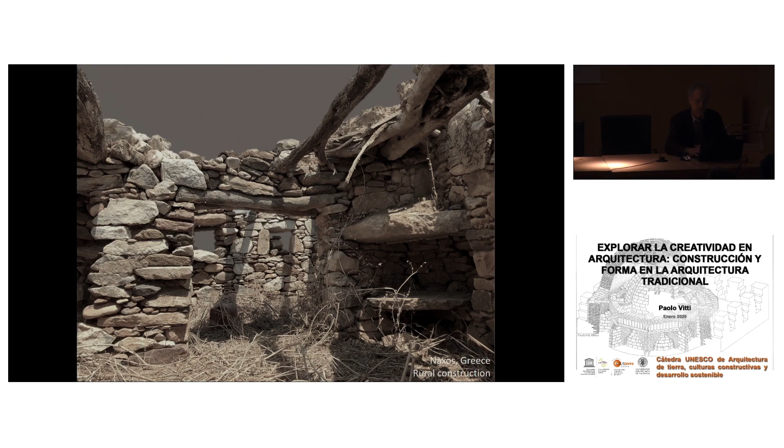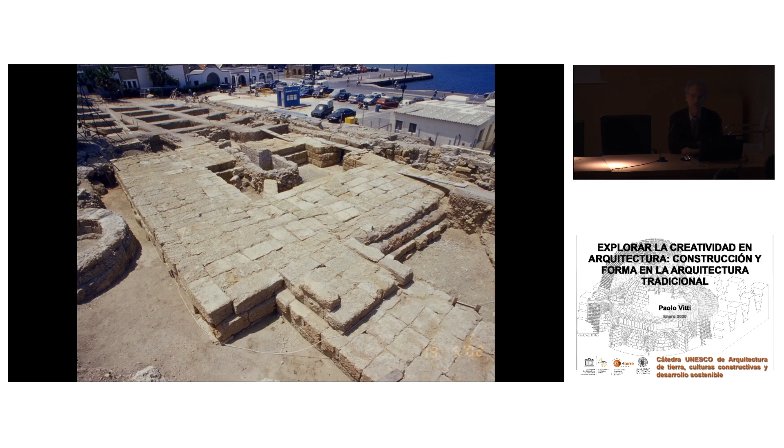I will start my talk with this sentence. There is a very famous architect, historian, conservator, the founder of the Faculty of Architecture in Rome, who is Gustavo Giovannoni. And there is this sentence that I find very interesting, especially today. The architect has to be, first of all, a builder. Forms must come out from a deep understanding of structures.

Doing the opposite, by beginning a conceptual design, a blank elevation, is irrational. And the young professional will never redeem from this. This is something to always keep in mind. Today we have many projects that start from the form and then get to the structure, while the right approach is to have a holistic, global view of the project.

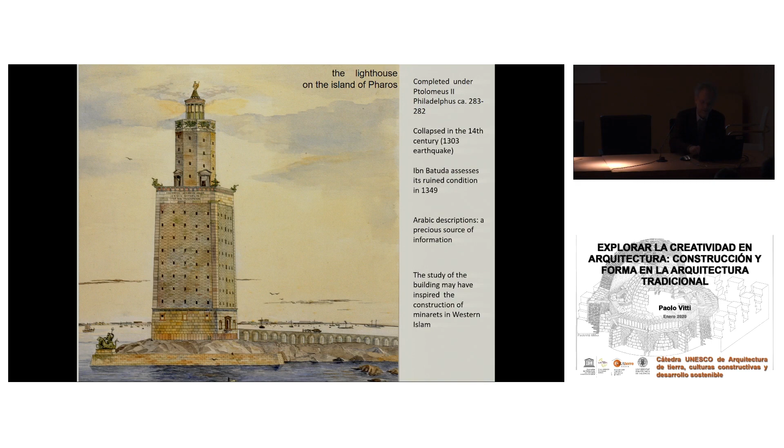I will start showing this, which is a very simple construction. Here the challenge is dry masonry without mortar. Materials are kept together by a good approach to resist the forces. And this is a vernacular construction you can find everywhere in the Mediterranean, but also beyond the Mediterranean.

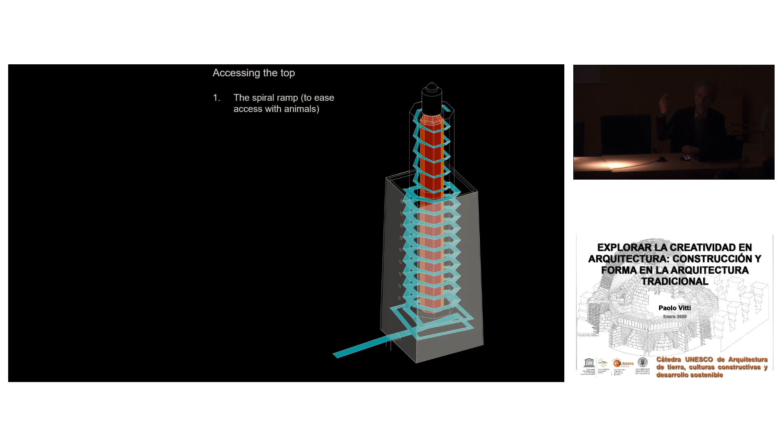In the Hellenistic period, that is to say from the 4th to the 1st century BC, there is a change in the dimension of construction. And the challenge is to make buildings that are monumental using the principles of dry masonry. Dry masonry, as we said, without bonding material, mortar. A typical example is in the island of Rhodes in Greece, where you can see a tower which is made with blocks, ashlars of stone, which are placed dry.

Now, one of the wonders of the world was the Lighthouse of Alexandria. I suppose you all know about this building. This building was completed in 283 BC, and imagine, it collapsed only in the 14th century AD. That is to say, it's a building that lasted for more than 1500 years, which is amazing for a construction which was monumental and was made out of dry masonry.

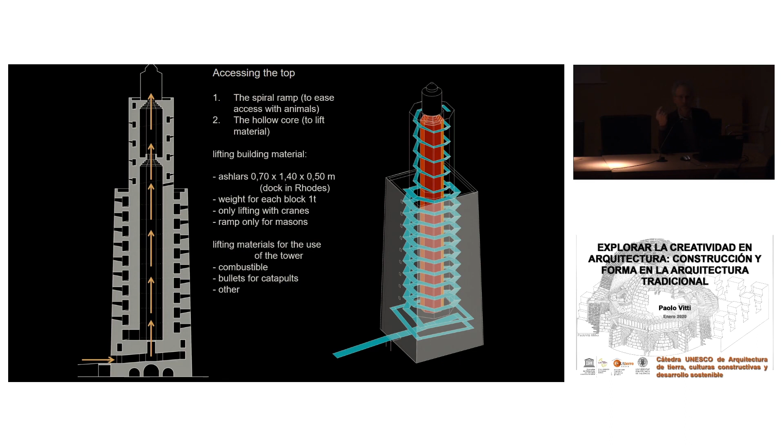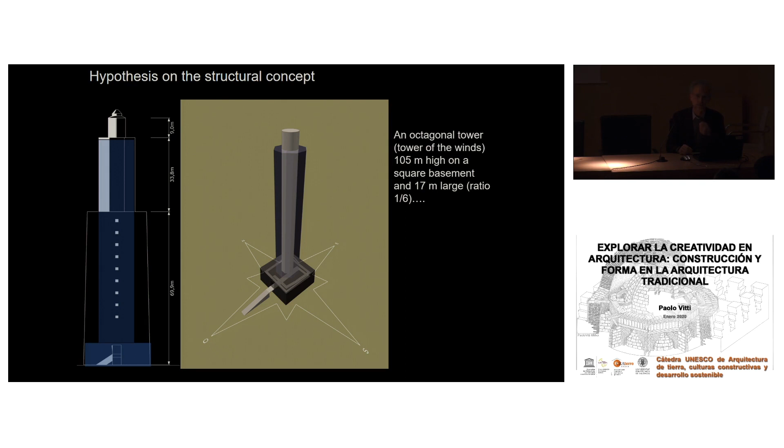So here we understand that the architect is facing the challenge of a structural system to transform it into form and architecture. So let's look closer at this project because it may be useful for understanding later architecture. First of all, since it has collapsed, we have no evidence of it. But we know very well about the architecture through the Arabic descriptions. The architects coming from Al-Andalus were traveling to Mecca, passing through Alexandria, and in Alexandria they were impressed by this architecture.

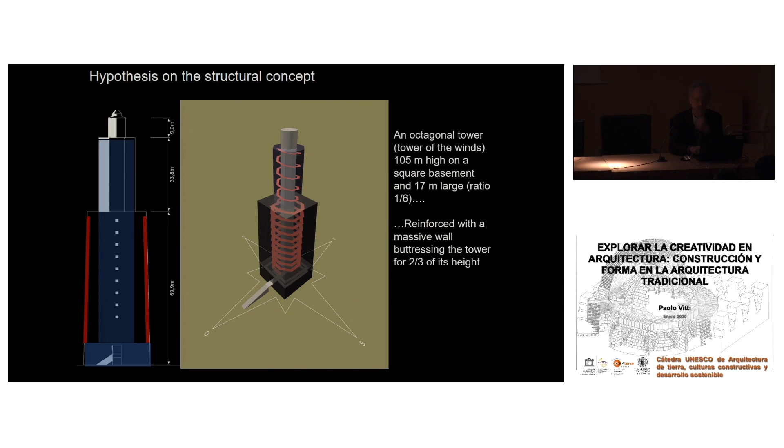From these descriptions, we know that this tower, which was more than 100 meters high, had a spiral staircase, a spiral ramp going up to the top, as you can see in this drawing. But most interesting is that the center of this gigantic tower had a core that was hollow, that is to say empty.

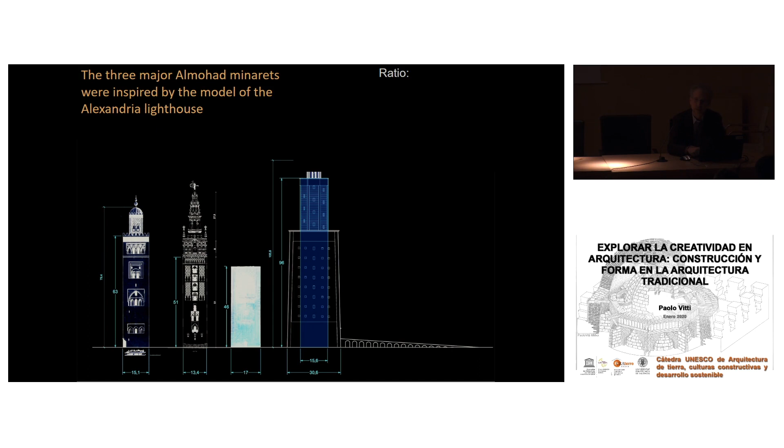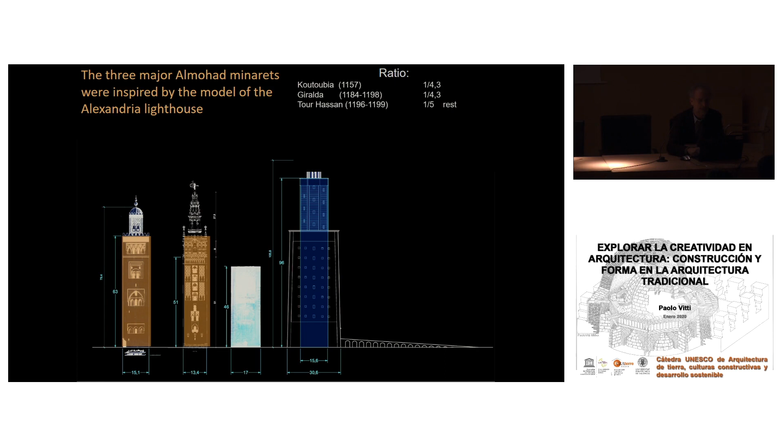This is exceptional considering the concept of Hellenistic architecture, which is based on the idea that if you want to make it big, you fill it with material. So the big towers would be something that has plenty of material and not a hollow space at the center. The reason for that is that this could make it easier to lift materials during the construction.

This was built on the island of Pharos. And Pharos is the name we use for lighthouse in many languages, as in Italian, in Greek, and many other languages, not in English, which is lighthouse. And the tower took the name from the island that it was on in Alexandria. And so the empty core of the tower was useful to lift up materials.

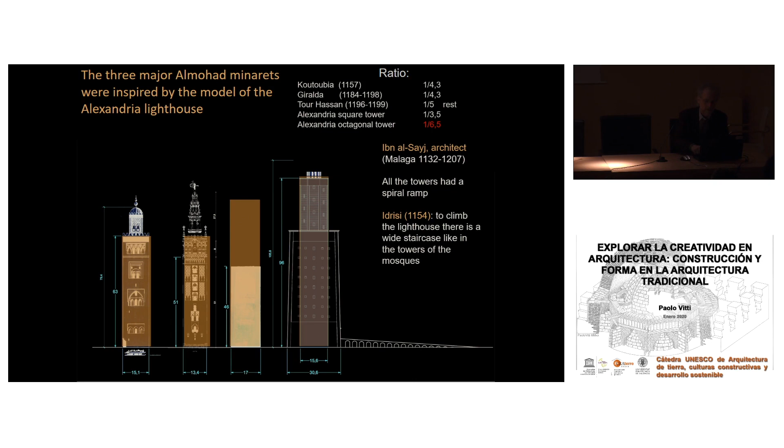But it was also useful because this was also a defense tower, so you had the use. So it was a very clever concept, but it was a challenge. The challenge comes from the fact that such a high structure in the 3rd century BC typically would have been built with a core which was filled with material in order to be high enough. So here the concept is extraordinary, is innovative, is a way to face not only the construction issues, but also the functional issues.

Imagine that this construction is built, there is a ramp. This ramp is used by the masons to go up, and the material is lifted from the core and placed all around. So the tower grows and goes up. Imagine doing the same thing with an exterior scaffolding. It would be very costly, you need a lot of wood, but most of all you are on an island. And so this poses many problems.

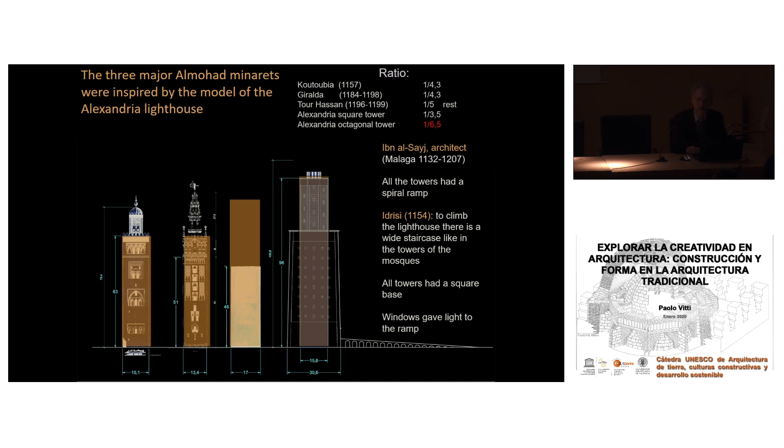But where does the form come from? Because the form of this tower is composed of two elements. You have a lower sector, which is made with a square construction, and then you have the upper part with an octagonal one. We know that from the sources. It's very clear.

The fact is that the octagonal tower had to be very high, as much as 100 meters. But in order to resist and to become stronger, the builders imagined buttressing this tower in the lower part. You see the red vertical lines. The red vertical lines are the ones which show this buttressing structure. So the form was generated from a concept, a structural concept.

Another very interesting element is that, as we know, under the Almohad dynasty, they started to build gigantic minarets. The first one of these is the Koutoubia in Marrakesh. These minarets have many elements in common with the Lighthouse of Alexandria. The Koutoubia was built in 1157. Then comes the Giralda, you know very well, in Sevilla. It's slightly later. And then the last of them is the Tour Hassan in Rabat.

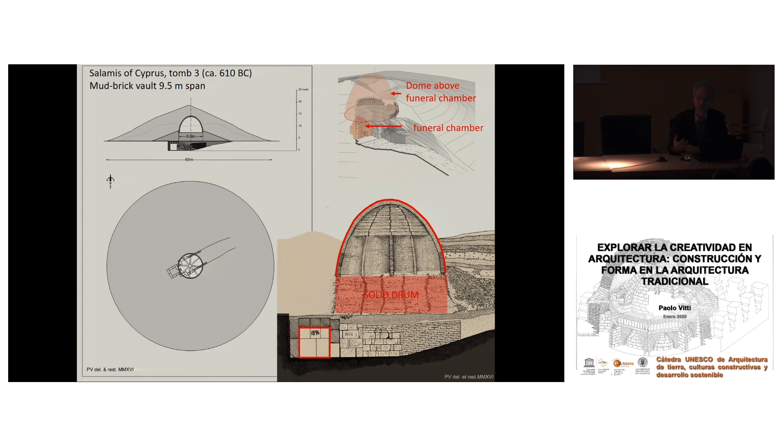Here I show the ratio between the base of the tower and the height. And then you have the Lighthouse of Alexandria, which, if you consider only the octagonal tower, you have 1 to 6.5, and it becomes more slender if you remove the buttressing part. This is to say that there are similarities.

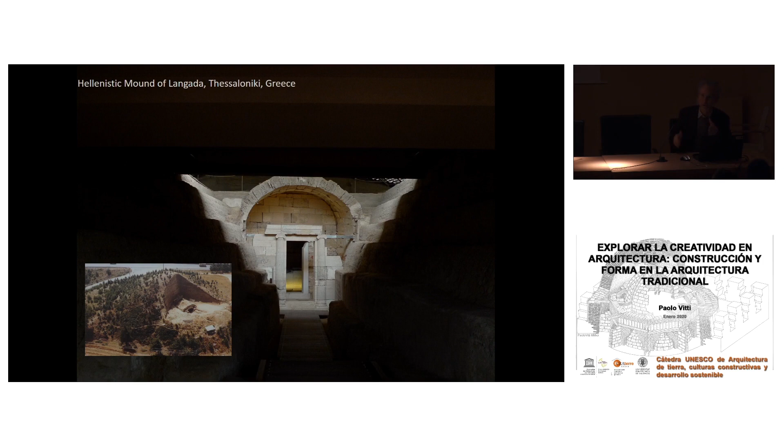But the most important element is that the most precise description we have of the Lighthouse of Alexandria comes from this architect who was from Malaga, who gave the most precise description of this lighthouse. And we are, as you see, exactly in the period when these gigantic minarets were built. So I strongly believe that these minarets were inspired by the structural concept of the Lighthouse of Alexandria.

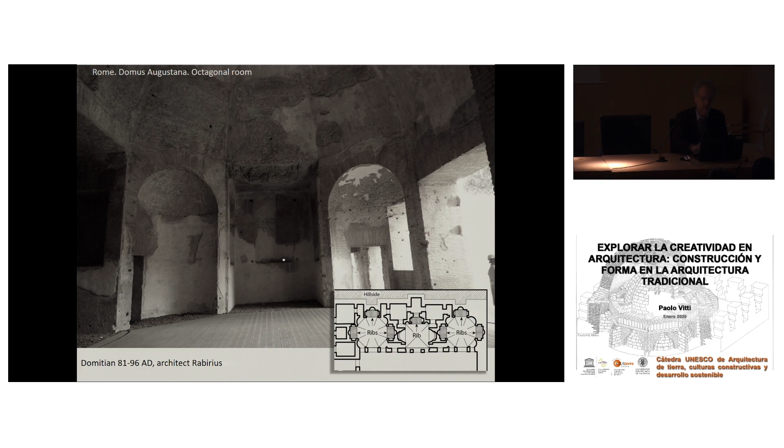This hypothesis is supported by the fact that the three minarets all have a spiral ramp which goes up to the top. Actually, this is supported also by the description of Idrisi: to climb the lighthouse, there is a wide staircase like the towers of the mosques. Moreover, in the three minarets, at the center, we have rooms which stand one above the other, which under a structural concept is the same as having the hollow that you have in the Lighthouse of Alexandria.

And of course, all of them have a square base and windows which lit the ramp. So I believe that in the Arabic culture, when they were to invent a new model for this gigantic architecture, they referred to the most impressive gigantic tower there was in antiquity, which was the Tower of Alexandria.

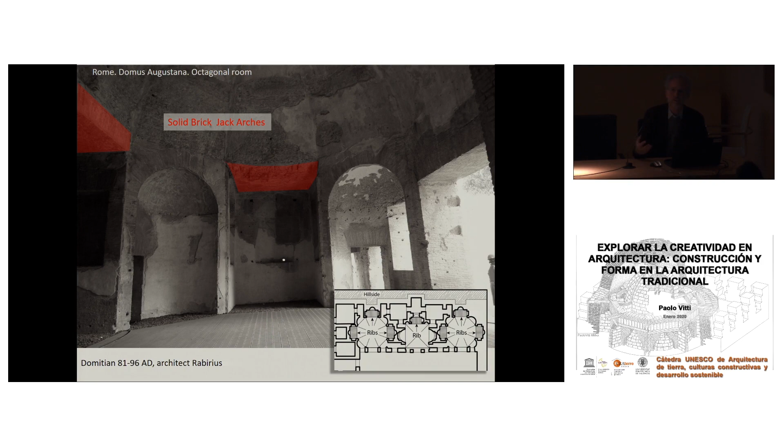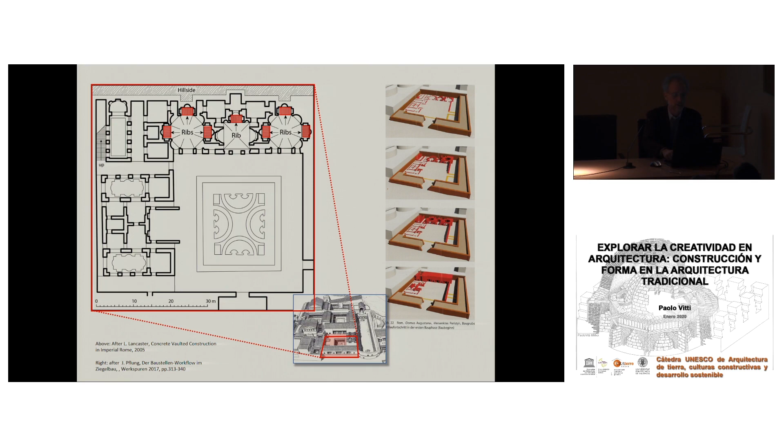Now, let's move on to another ground, a ground that is much more challenging. We pass from a system which is based on the so-called post and lintel, that is to say, the weight is transferred through vertical forces from one stone to the other through the contact. We pass to the structural system generated by arches and vaults. As you know, this generates thrust. Thrust is empuje.

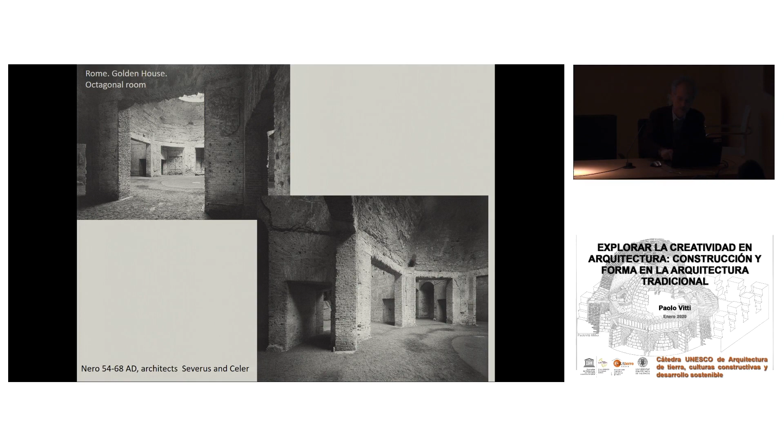So this was something that we all consider was somehow invented by the Romans. And all the Roman architecture, as we will see, found impressive architectural solutions and structural layouts through the use of arches and vaults. However, it's less known that one of the most impressive monumental vaults, which is only partially preserved, is to be found in the island of Cyprus.

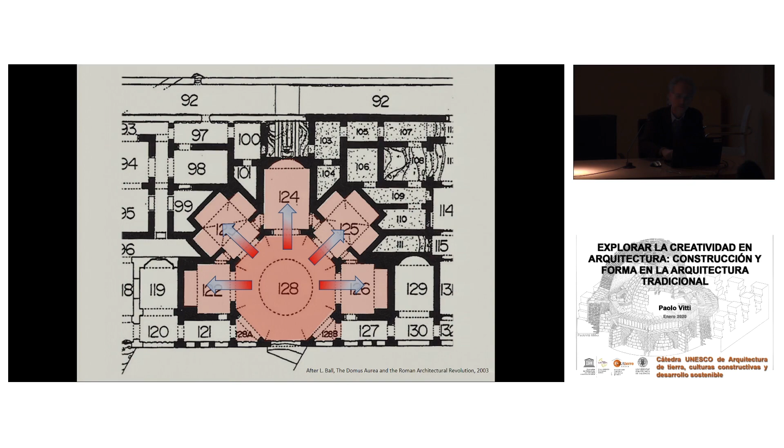This dome has a span of 9 meters and is made with mud bricks, adobe, placing the bricks radially. So it's not like a Mycenaean tholos, which is a false vault with elements placed horizontally; the elements are placed radially. So as far as we know, this is the first monumental dome in the history of architecture. Above this dome there was the mound, and I will not give more details, but the structure is particularly interesting because this dome was not accessible, it was a symbolic dome.

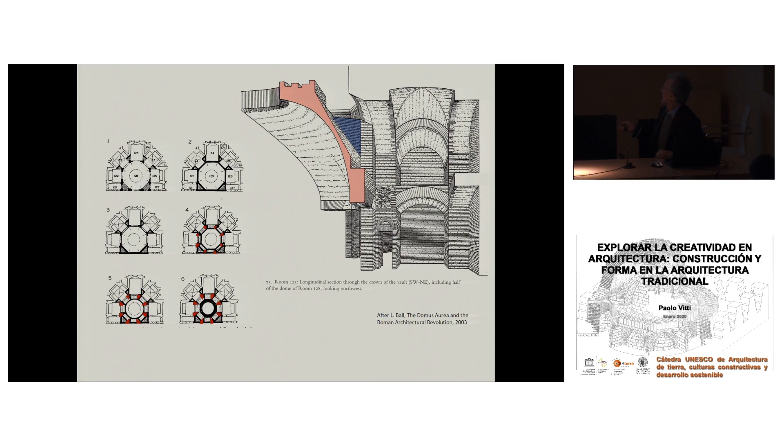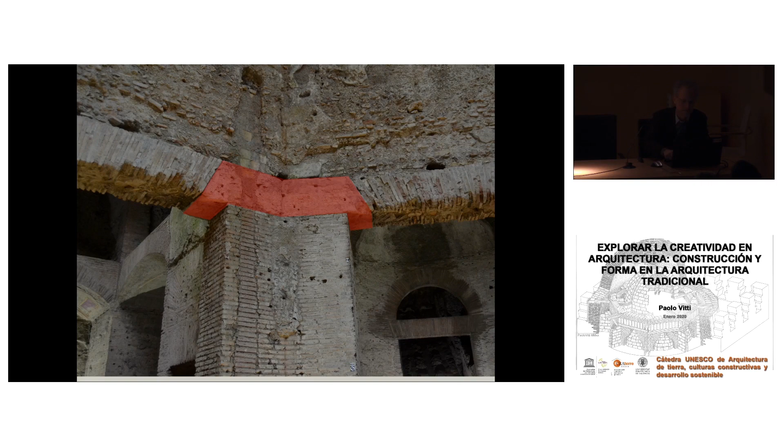But then we go to the Romans. The Romans, of course, it's a very long process, started to use in a massive way the concept of arches and vaults. What we see here, on the Palatine Hill in Rome, is the Domus Augustana, the imperial palace, and we have these octagonal rooms which face the challenge of having these niches all around, below the massive dome that stands above the niches.

And here, for this solution, the architects used a very untypical system for creating the jack arches. How is it in Spanish? See? And they create these elements only with bricks in order to make them stiffer, stronger. So they are thinking. But from the picture, you understand that the light that gets into this room is very limited.

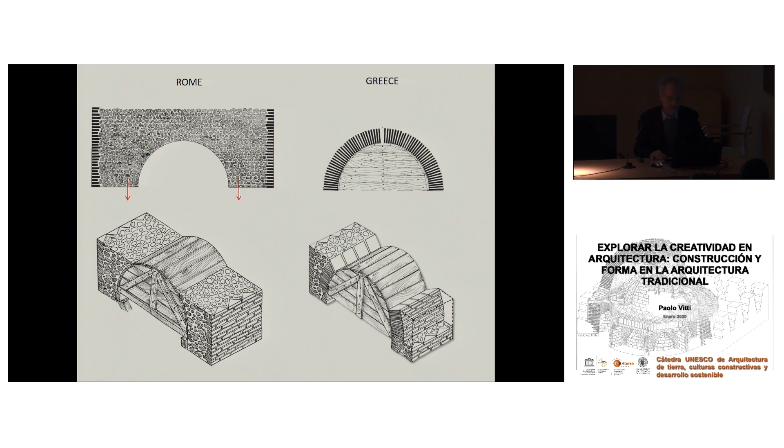And so you know very well that architecture is the game of light. The more you can use light, the more you can give significance to the interior space. And we know that Roman architecture was revolutionary not only for the engineering and building techniques, but also for the idea of space, generated also through the use of light. Greek architecture we typically consider an exterior architecture. In Roman architecture, it is the interior space which becomes formally extremely important.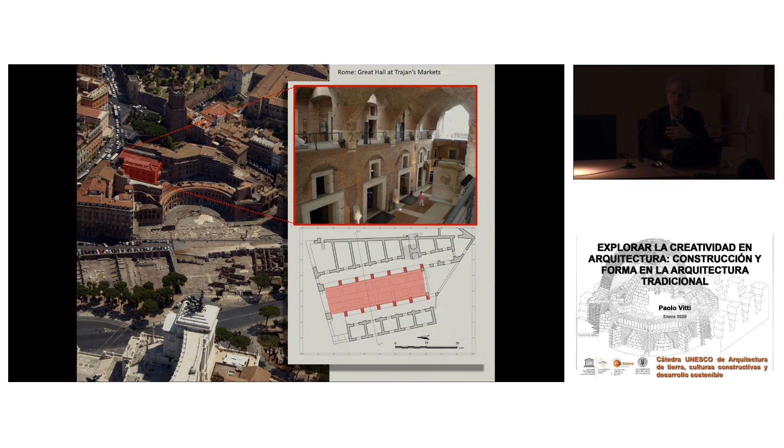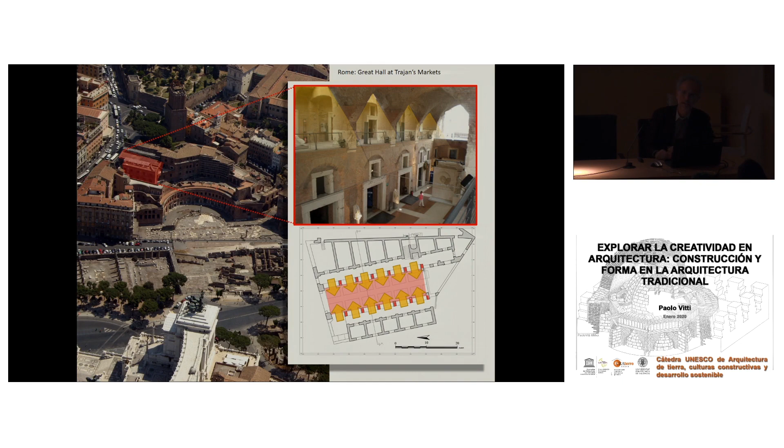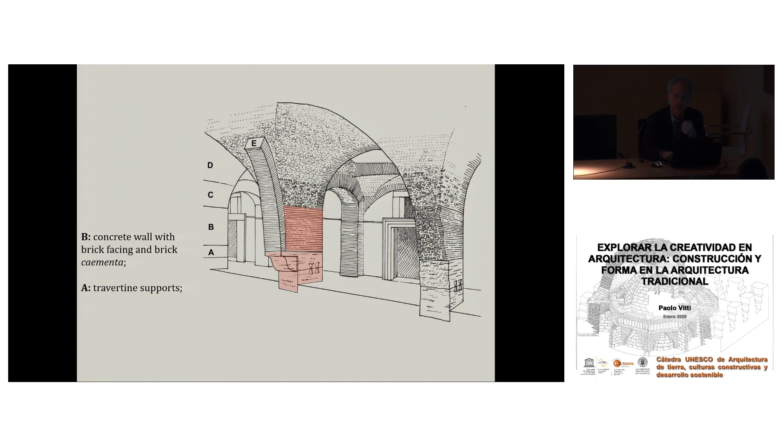The architect wanted a space that was expanding, and to create this, he needed light not only in the central room, which is lit from the opening on the top of the vault, like the Pantheon, but also through the light entering the side rooms. And he wants to reduce the supporting walls of the central dome. How to do that? You need two elements: first, an extraordinary high-quality construction technique, and second, a very impressive idea of the structural layout.

How to achieve that? The idea is very simple. If you look at this section, you see that on the left you have the dome, and on the right you have the rooms, which are lit through this element. You don't have the mouse, I don't have a pointer, but you see on the right of the red vault, you have a window which gives light to the room.

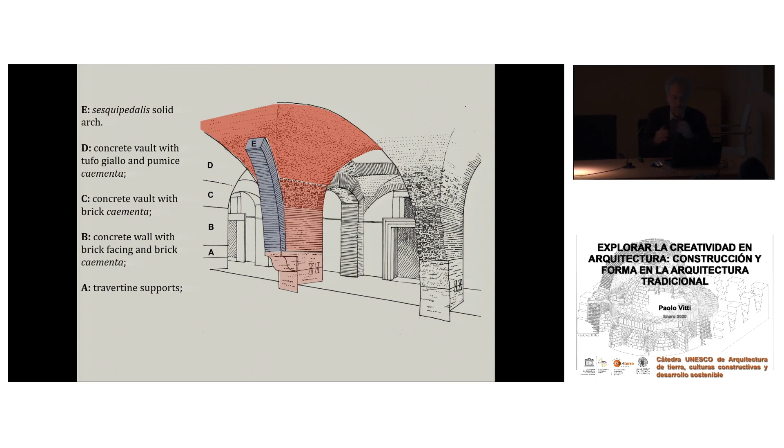So from a point of view of perception, you have light inside the room and outside the room, but you are within a construction. To do that, the architects have created some buttressing walls, buttresses. How do you say buttresses in Spanish? Contrafuertes, which are hidden, as you see here, in the red elements, which are hidden around the.

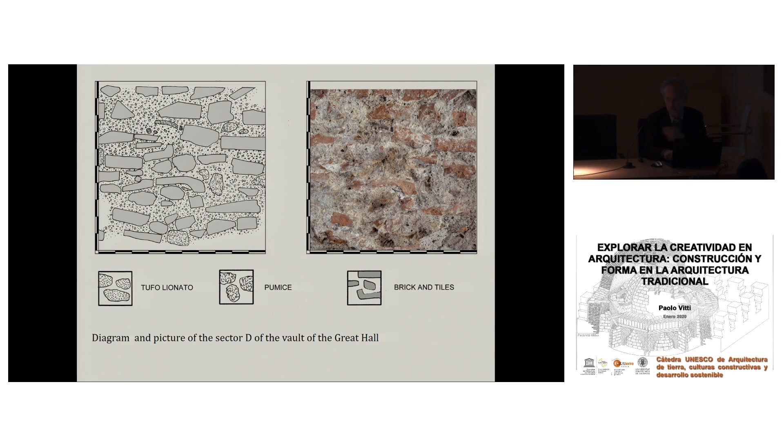Okay. These elements are hidden between the windows. This generates something that was extraordinarily innovative in architecture. How to have these immense openings? This is done through the use of concrete. This concrete, hormigón romano, is unreinforced. There is no iron.

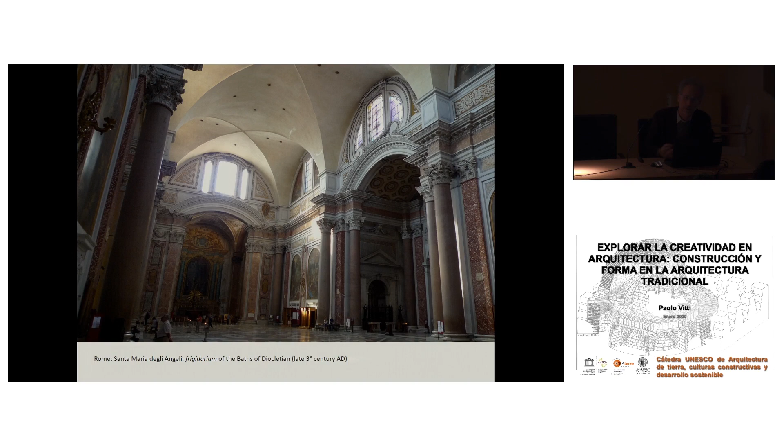And these elements are strong enough to divert the forces onto the pilasters. In the most compressed part, you have travertine, stone. So they understood how to use the materials, and the capacity of the materials to resist the stresses.

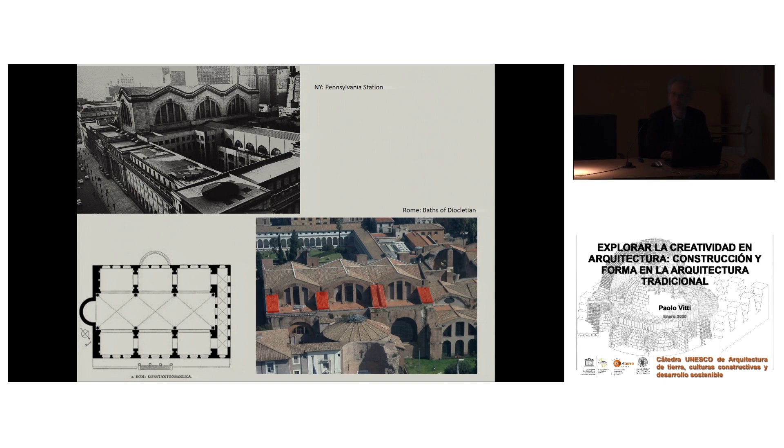Actually, in vaulting, we have two systems in Roman times. The first system is the one we know of concrete, hormigón, in Rome and in the area of Naples. Rome is known for concrete structures, and the concept is very clear. You have a centering, cimbra, on which you start to lay layers of materials. These layers of materials are made of small stones.

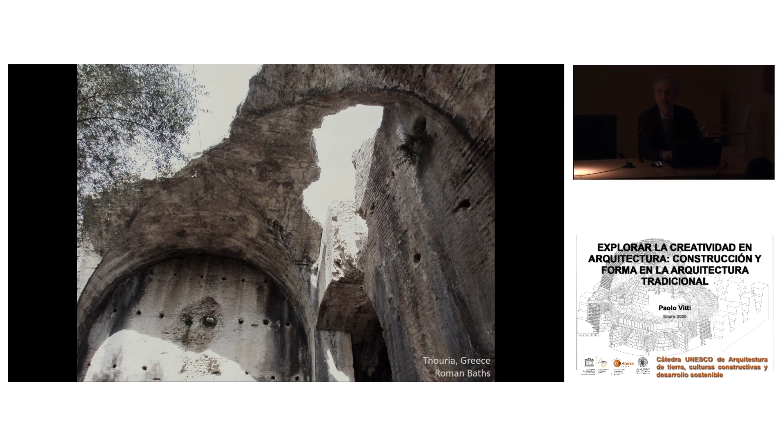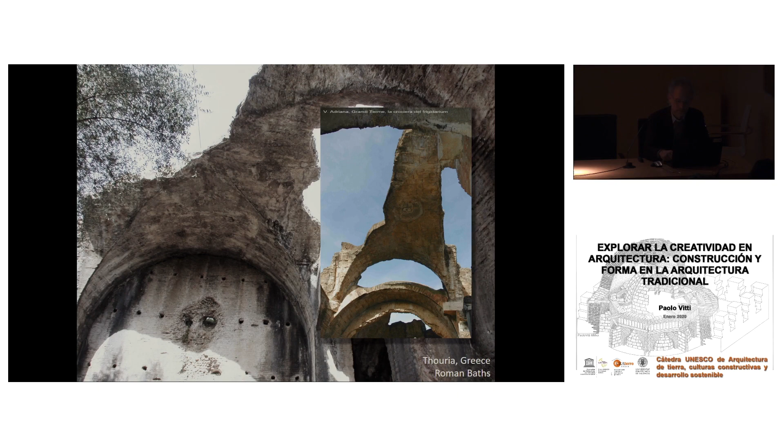Imagine that these stones are as big as my hand, placed in horizontal layers, always horizontal layers, and of course they are bonded with an extremely high quality hydraulic mortar, mortero idraulico. The reason for the horizontal layers is very simple: placing the materials by hand in horizontal layers, you avoid voids. At the same moment, you can tamp, you can compress this in order to make it stronger.

Then, of course, before removing the centering, the cimbra, you need the element to dry and to become kind of monolithic and strong, so that you remove the centering and then the forces are transferred from the vault to the supporting walls.

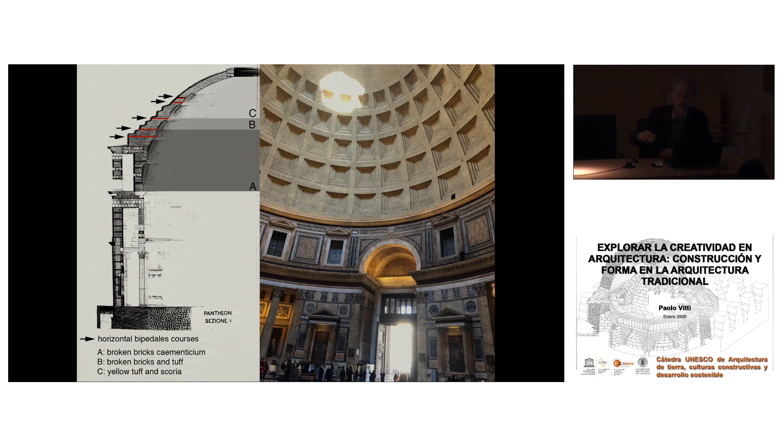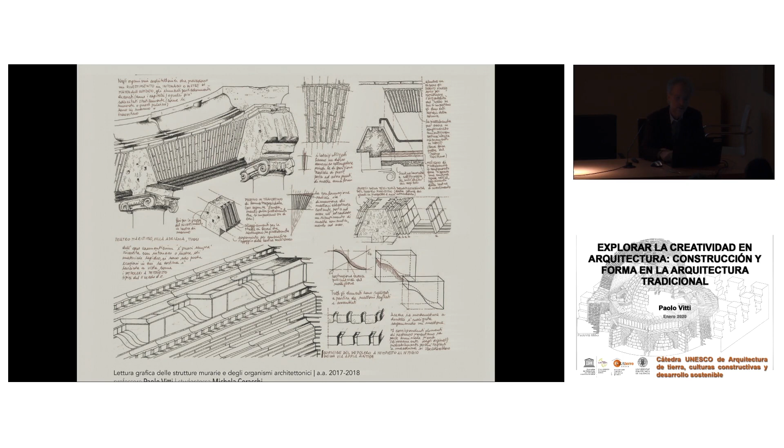But there is another system, and this system was used not in Rome, but developed in Greece, in the Peloponnese. It's made with the construction of brick vaults. The concept is similar. You need a centering, a cimbra, to place the bricks. And then once you place the key brick at the center, at this moment, the arch starts to work and diverts the forces to the supporting walls.

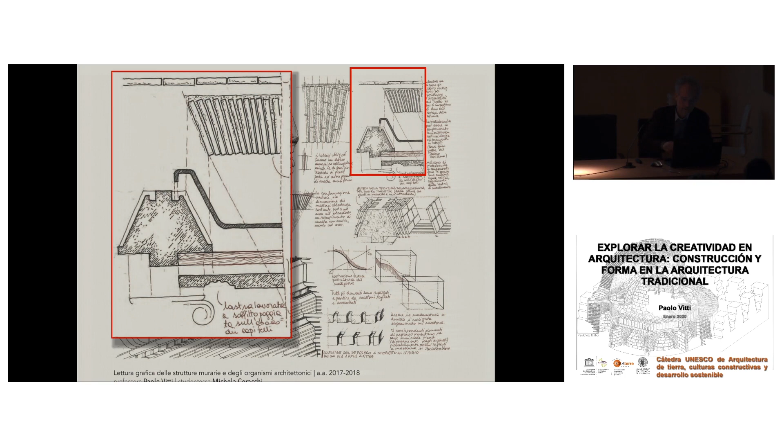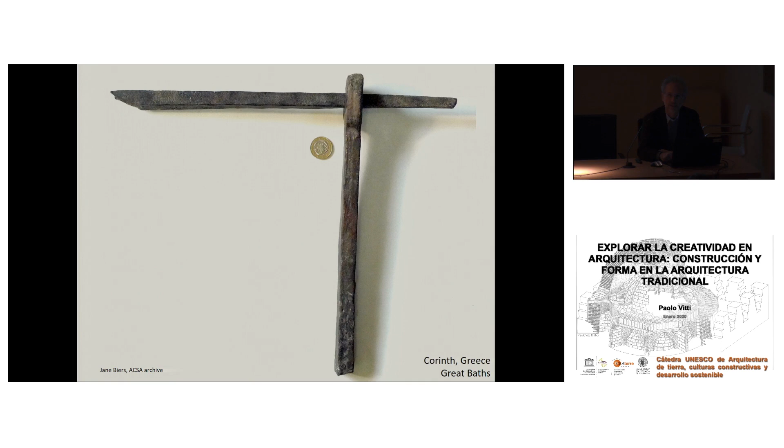Then you can remove the centering, and at this point, you can build above this the concrete structure, because Romans were thinking with massive structures. So only in later architecture we start to use thin brick vaults. The reason for that is that the Romans in Greece did not have good hydraulic mortar. And so they could not afford to have structures like the ones in Rome.

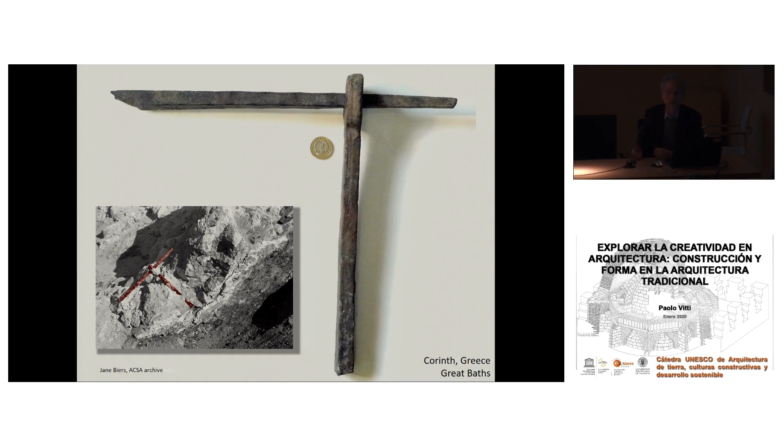So they invented a system through this centering, through this brick vault, which becomes a system where once you place the key brick and the pressure is transferred to the arch, the structure is working because it has very small mortar joints. So this allows you to make the structure quicker and stronger.

Imagine that brick vaults are actually one of the most used systems for vaulting in all Europe, and beyond, of course. So this revolution happened in Greece between the end of the 1st century BC and the start of the 1st century AD.

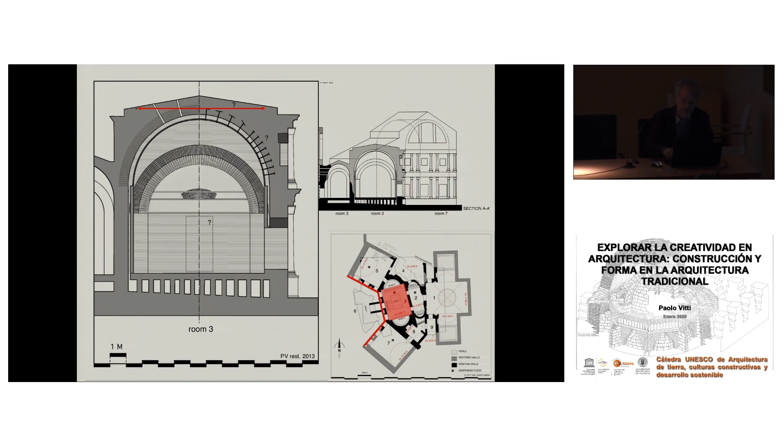But let's go to another impressive building. This building is Trajan's Markets. Have you ever been to Rome? Some of you? So it's one of the most impressive buildings. You see this vault? This vault is like a sail. It is a concrete structure which has openings all around. It's located in one of the most renowned parts of the imperial fora in Rome.

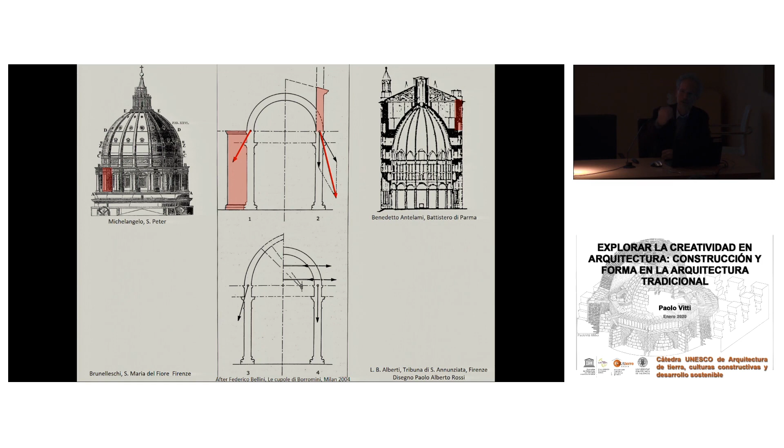And above this, you have a very particular system of concrete made with bricks, 2 layers, and the upper part is made with concrete with lighter materials. Since the thrust, empuje, is generated by the weight, by reducing the weight, you reduce the thrust. So there is a complete understanding of materials, building techniques, and structural layouts.

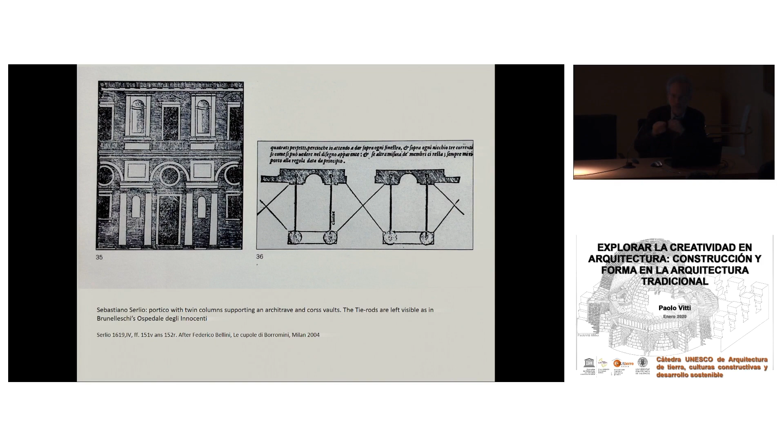So we are going through masterpieces of architecture, but these masterpieces are interesting because they teach us how the problems were solved between construction techniques and forms of architecture. The formal part is connected to the construction issues, and sometimes we don't know who is influencing the other.

Was the capacity of the Romans to generate an excellent construction technique that made it possible to generate new forms of architecture? Or these new forms of architecture challenged the architects to find technical solutions and building techniques that were up to the level of efforts? We don't know. Possibly there is not a solution in this sense.

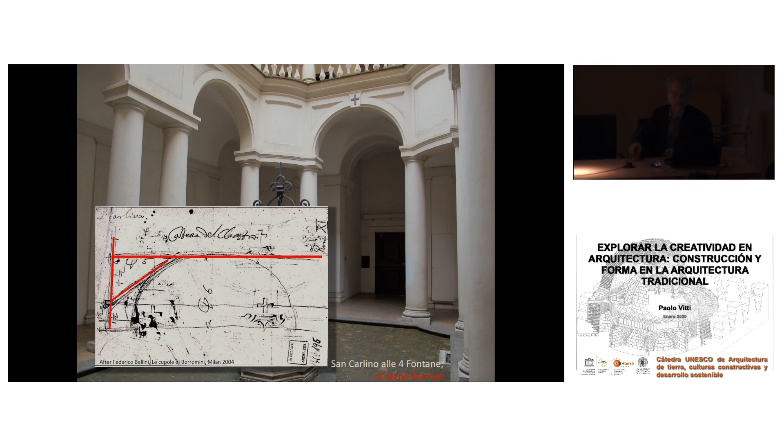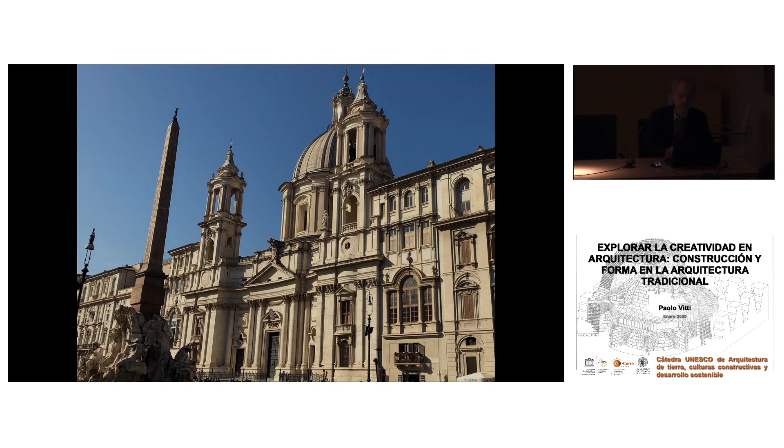The study of Roman concrete has displayed that Romans, by the 2nd century AD, had developed an immense understanding of the quality of concrete, up to the point that we understand today that while modern concrete has a very short span of life, it can last 100 years, Roman concrete, the older it gets, the stronger it gets. So it's an incredible material.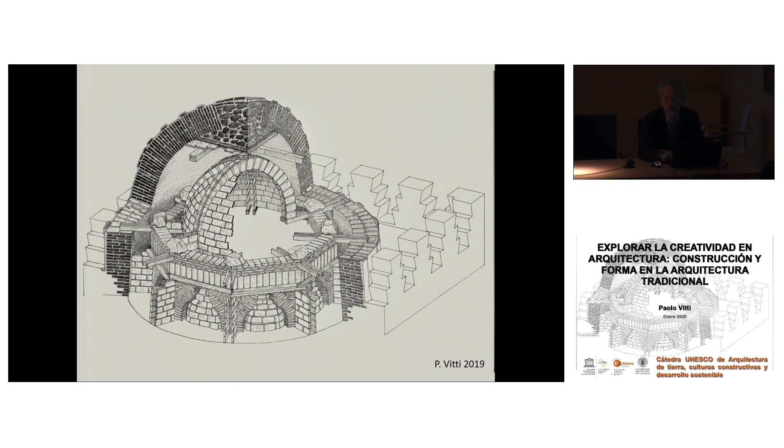These layers of bricks, and brick was used by the Romans because it was a very resistant and excellent material, so they were using them as tie elements, as elements of resistance within the concrete structure. We are thus not surprised to see that this concept was adopted also in Rome, in few buildings, but one in particular, the Pantheon.

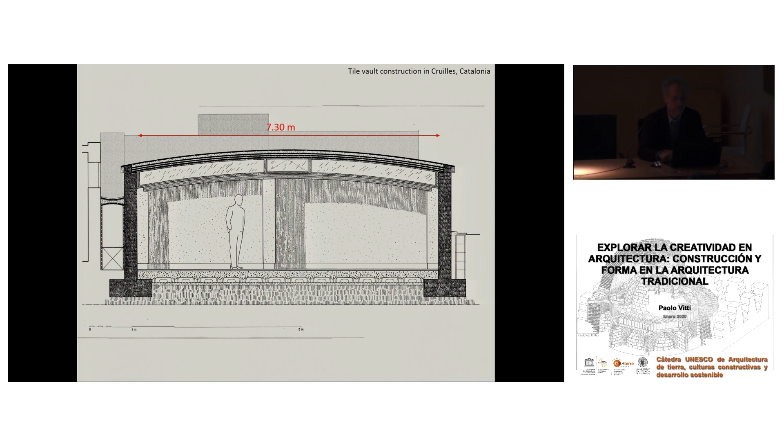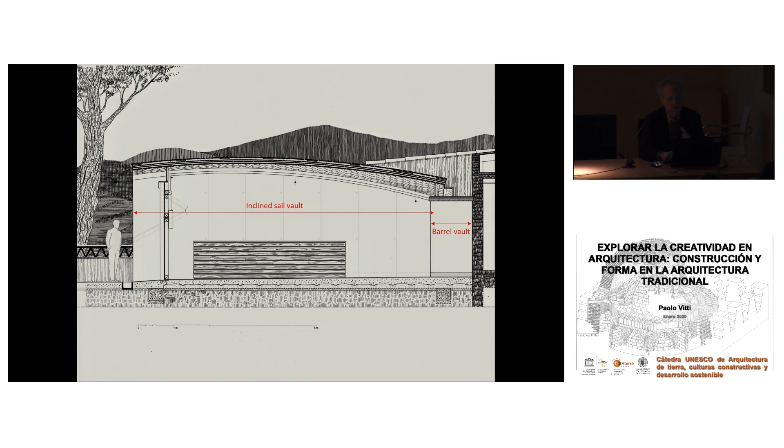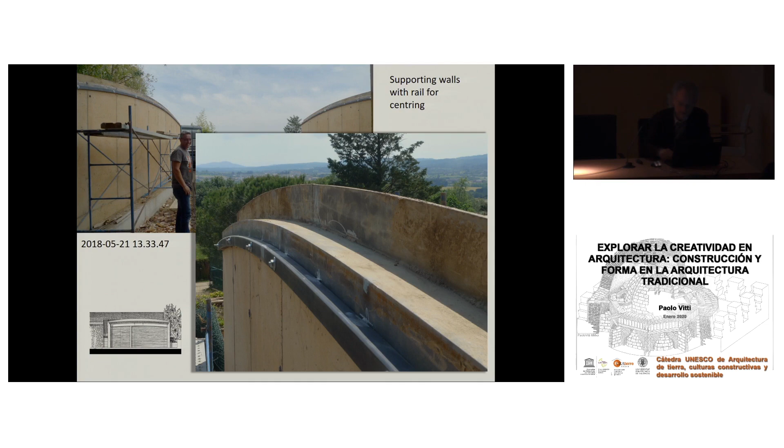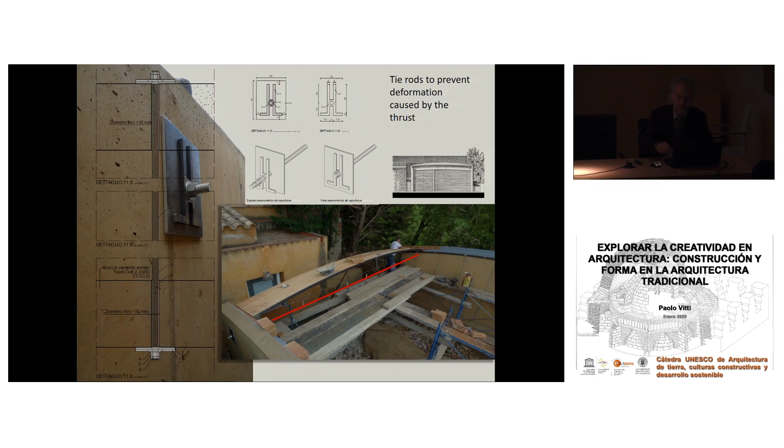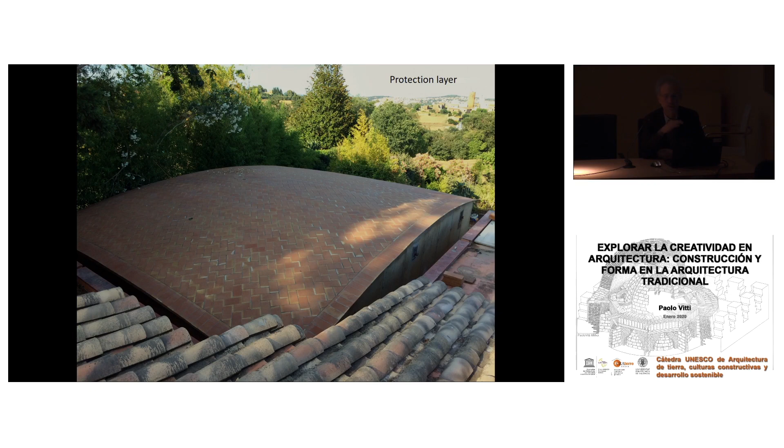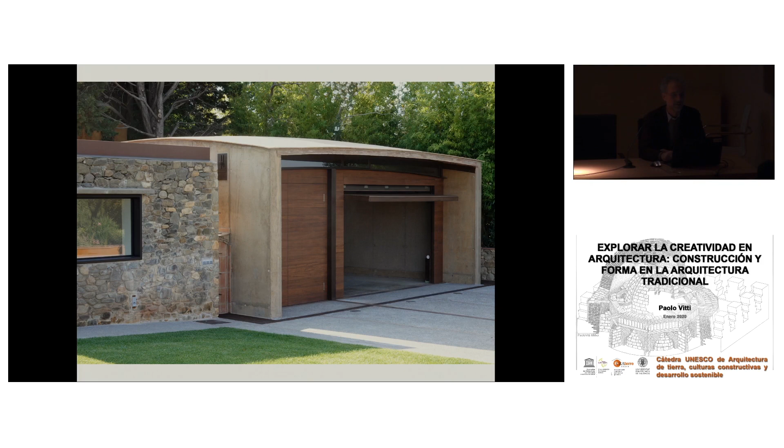We know now, after the studies of Janet DeLaine, Carla Amici, Lynn Lancaster, that these iron bars were used also in other buildings in Rome. But the evidence is possible only in this bath building, because in Rome all the metal elements were reused and taken out in the Middle Ages and were lost.

So not as we do at the level of the haunches, los riñones, or at the impost. Here they are above. And there were other elements, these bars, which were used to hang a counter vault in the hot room.

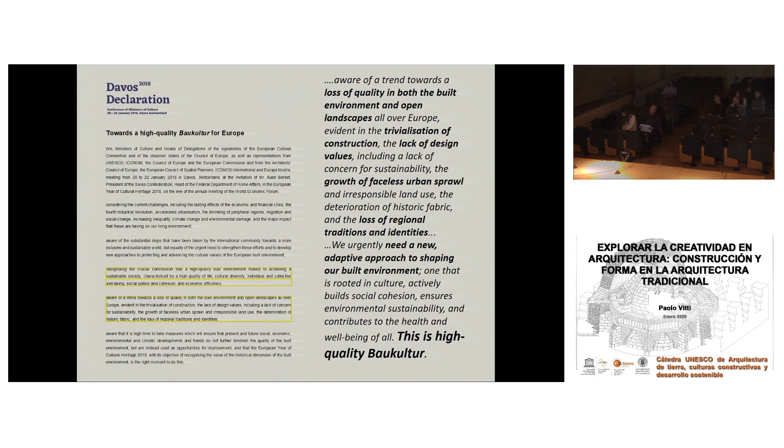Another solution was the one adopted by Brunelleschi. I make the profile of the vault higher, and in this way I succeed again to have a vertical thrust, because all these architectures have an element which is particularly powerful for the image of the dome: they rise on a high drum, so they can be higher and more visible, and they allow light to enter through the drum inside the church.

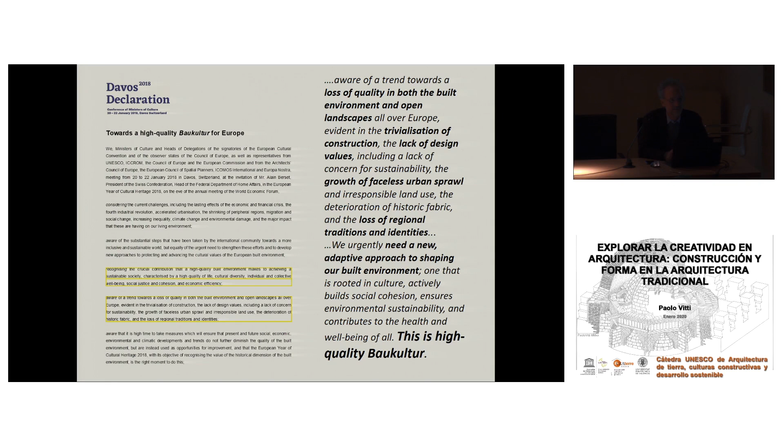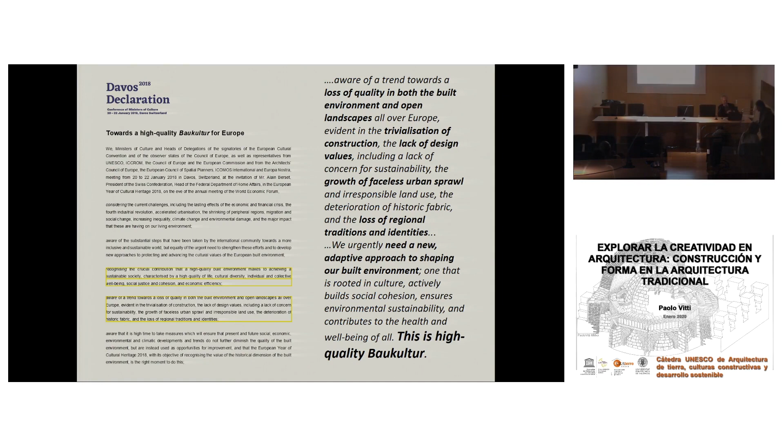It's interesting to notice that the original project, made by Rainaldi, was intended to be without the drum, because the drum would have challenged the thrust generated by the vault. When the project passed to Borromini, Borromini created the drum and raised up the dome. And